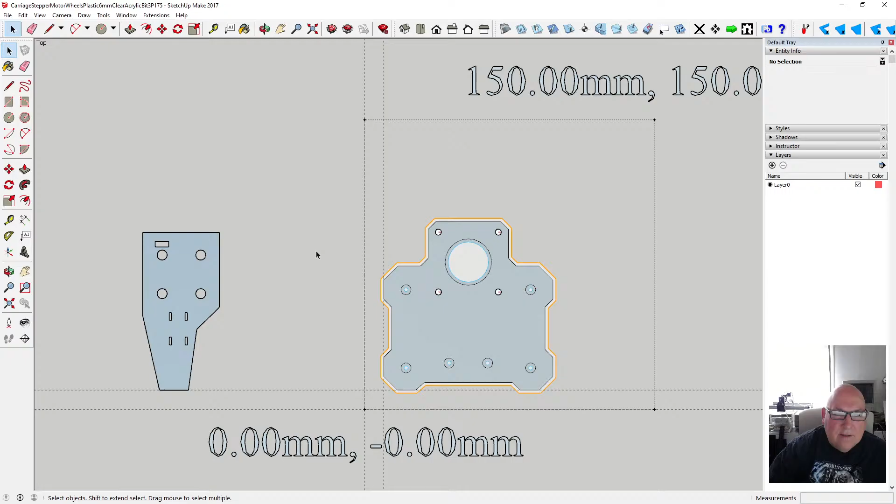So what I want to do is load up one I've already done the design for. Right, so we'll load up this one. Reason being, it's got all the right settings in it as well. So I've already gone ahead and done that one.

So I'm going to save this as... stepper motor, right. So this is going to be called tube clamps adjustable.

Okay, so get rid of that, get rid of that. It's the plastics, it won't be 6mm clear, it'll be something else. Probably 15mm. 15mm, or I'll tell you what, let's make it out of 6mm. I've got an idea. Right, I've got an idea.

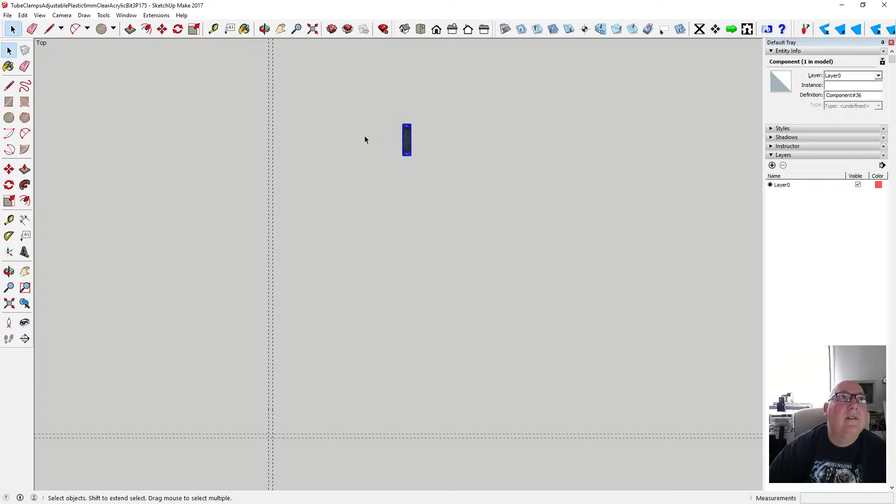So first thing we do is delete all this and paste in place. Shouldn't have pasted in place. So what we'll do, we'll grab this, bring it down here to work on it. Look at it straight on or ISO. I'll just bring that down here.

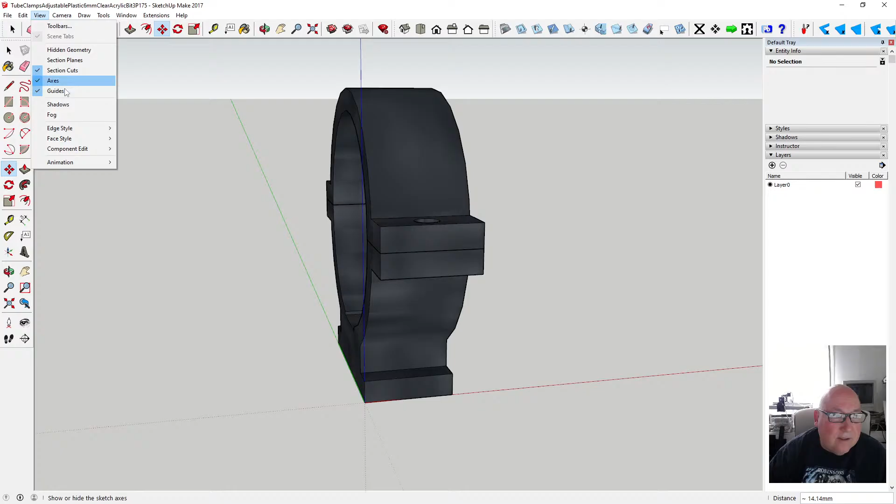So I'll just move that to the corner like that. Hide our axes. Okay, so we're going to start with this. We've already got, this is just the building blocks for our design. Now, I think I can either make it similar to the idea of sandwiching it.

Let's see what we can do with it. At the minute it's too wide. It's probably 20mm wide, I think. Yeah, I don't have any 20mm plastic, but I have some probably 10mm, not white nylon, which is not bad. It's nice and soft, it's not a hard plastic.

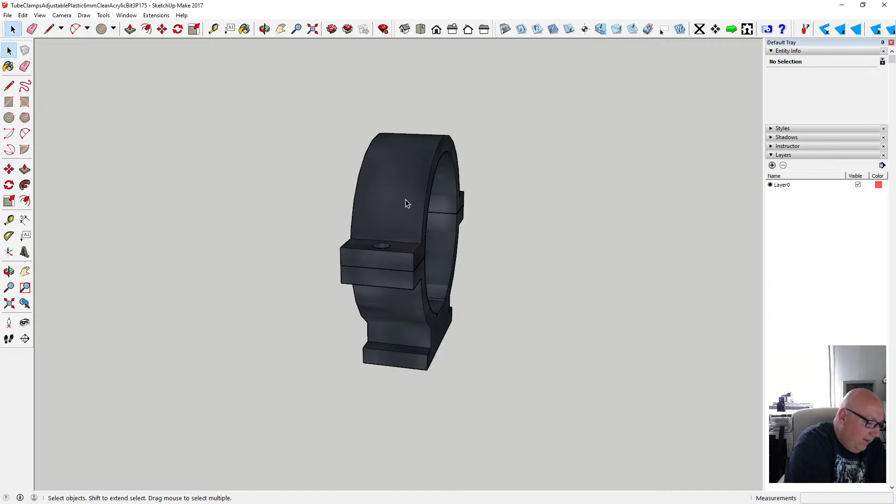So, anyway, I think we'll change it to white. Let's change it now to white. Let's change the design to a white, milky. We've got a synthetic surface. Light quartz grey, what's that like? Yeah.

Actually, I don't... oh yeah, that's okay to do that. Yeah. Actually, how did I get that? How did I suddenly? Right, don't know. I seem to have it all selected at first, so we'll have it white nylon. Hopefully we can see it like that.

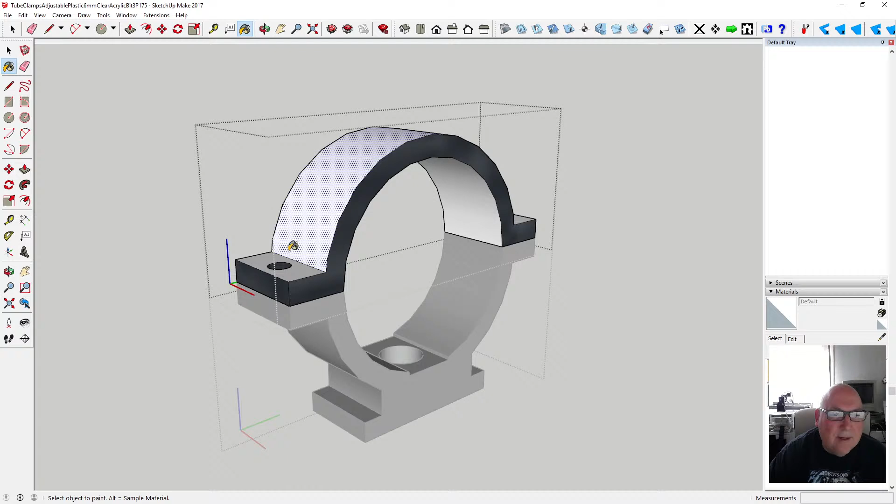Let's have a look. Yeah, that looks better. I can maybe, unless it disappears into the background once I've finished painting it. Let's paint the bottoms. Is it going to disappear into oblivion when I click out? No. Right, okay, that's alright, I like that.

So, yeah. Right, let's do the bottom one. So yeah, oh that's it. Selects everything, all the edges as well. Don't want that, I'll end up having no outline on it.

So I've got a nylon, something like milky nylon. I'm pretty sure I've got a bit of that material left.

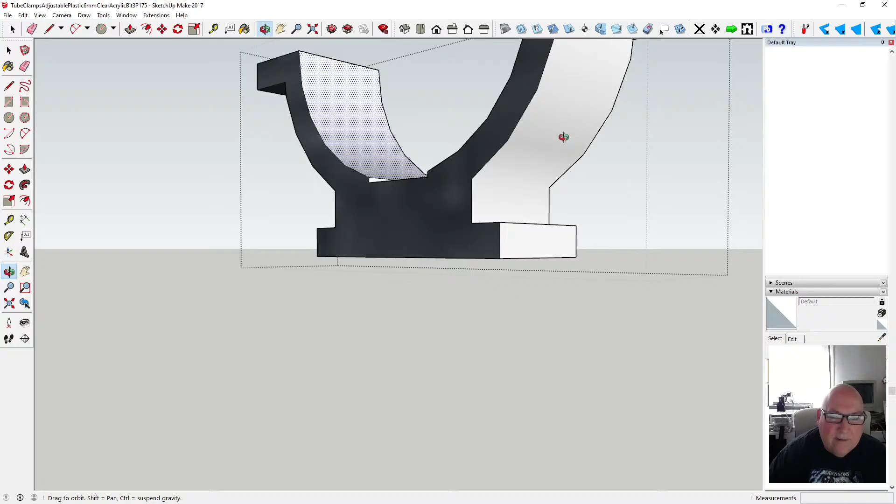Anyway, Friday night we had a bit of a stream last night. Bit of celebration on it. Celebrating, don't want to make too big a deal of it. It's nothing big a deal. But I think it's tradition to mark certain milestones with YouTube channels. They mark the milestones and maybe look back on it in better times or future times.

Okay, so we seem to have everything covered there now. Okay, so this is our building block. So it looks like we've got two separate things, so we need to continue to model this. This is our constraint, so we're constrained by the size of the tube, we're constrained by the height, which we can't change. Now we can alter the position of these clips and adjusters.

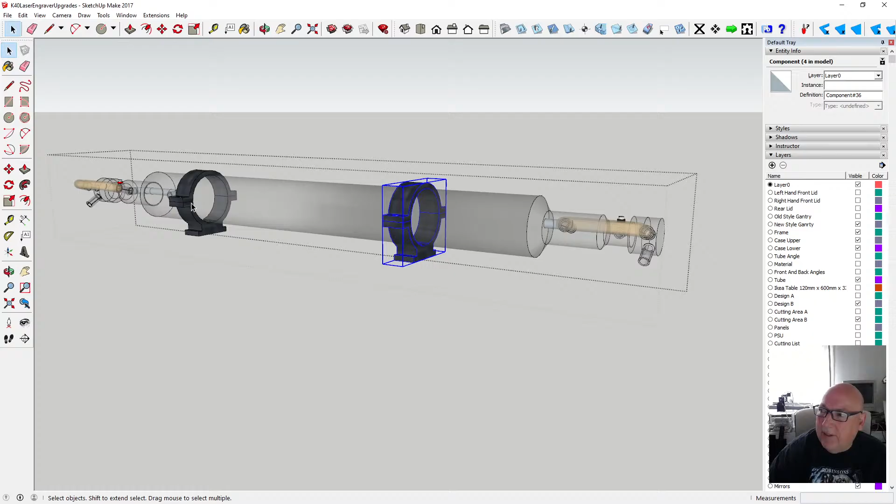So we might have to have two different ways of adjusting this, because there will be two clamps ultimately. One, as you can see, over on the model. We've got one there on the tube and one over there, just like that. I didn't really like the idea of them sticking out the sides. If they could stick up, I don't mind one sticking at the top. And obviously you need to join it up, whether they latch in together.

Actually, that sounds like a good idea. When I mill them out, because I'm not gonna - I was gonna 3D print them, but I haven't set the 3D printer up. I know I've got a known work path with the CNC and milling out the plastic.

So wouldn't it be nice if we could hook that through, if this one could be milled to hook through this one. So you bolt it, yeah, because we need to bolt it. There's a hole there, it needs to be bolted down. You can't see it from this one. Hang on a minute, so it bolts down to the...

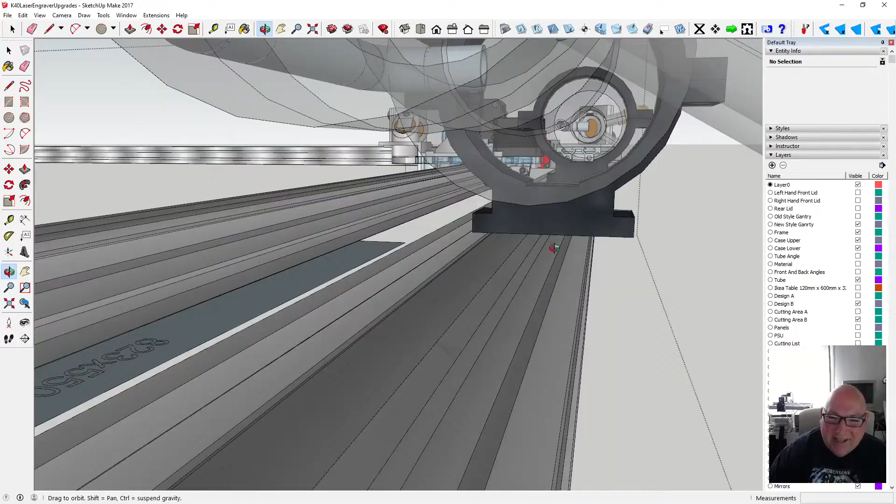Oh, some good news as well. Bolts down to there with a T-nut. Yeah, simple as that. So some good news as well.

I don't know if they've cancelled the metal from eBay yet, I don't care about that really. But I ordered some off Amazon, Rainforest. Anyway, it said it was going to come Sunday, it's now saying it's going to come today. So that is good news, I think it says today. Yeah, so hopefully we'll have it tomorrow. So by Sunday it'll have all the bits to be able to get on with it, basically.

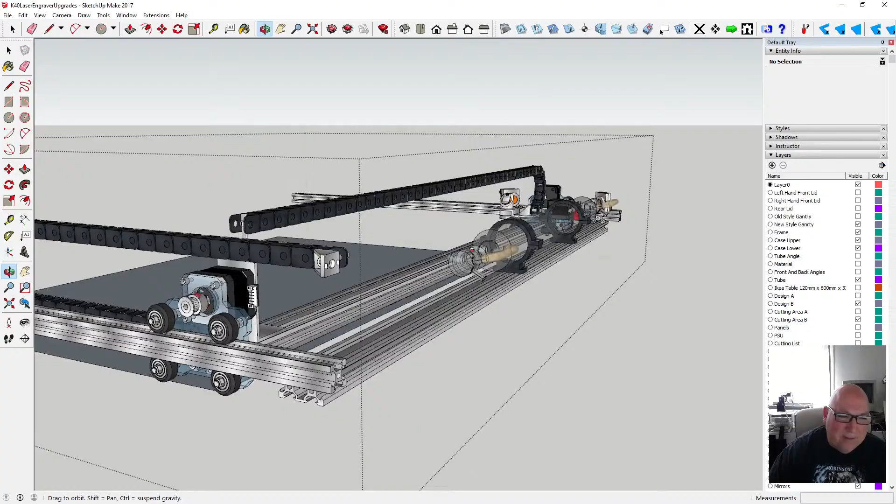So I'm going to take today's opportunity to create the plastics and the tube clamps and the end. These plastics here, we've already got those ready to be milled out, all G-code up and everything.

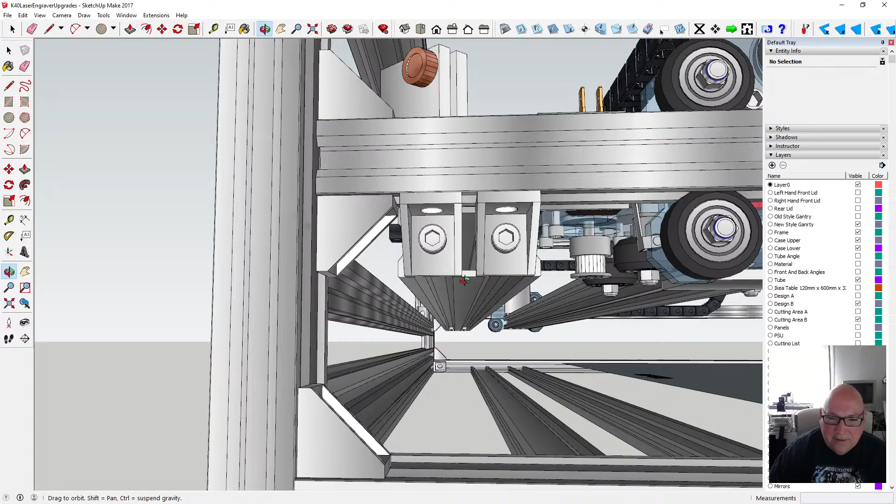So initially I thought we don't need adjustable clamps because once it's set, it's set. I mean really you could adjust - you can adjust, I don't suppose you can adjust it now. Actually no, no you can't really adjust. The way I've done it now, there is no real adjustment apart from any wiggle room that's in there. The only adjustment you've got is lateral, so you keep one end fixed and move the other end up and down like that, but I'd rather keep everything parallel as best I can.

So anyway, we're going to introduce some kind of adjustment, I don't know what, I ain't got a clue what. So it might consist of some kind of elongated hole here, you put your fixing through, then a screw adjustment that you tighten that moves this that way. So you need one-way motion on one and some kind of up-down motion on another.

Now up-down motion, not as easy as it sounds. Anyway, any clamp will be better than no clamp at the minute. So any clamp at all gets us started. I won't be putting that tube on anytime soon.

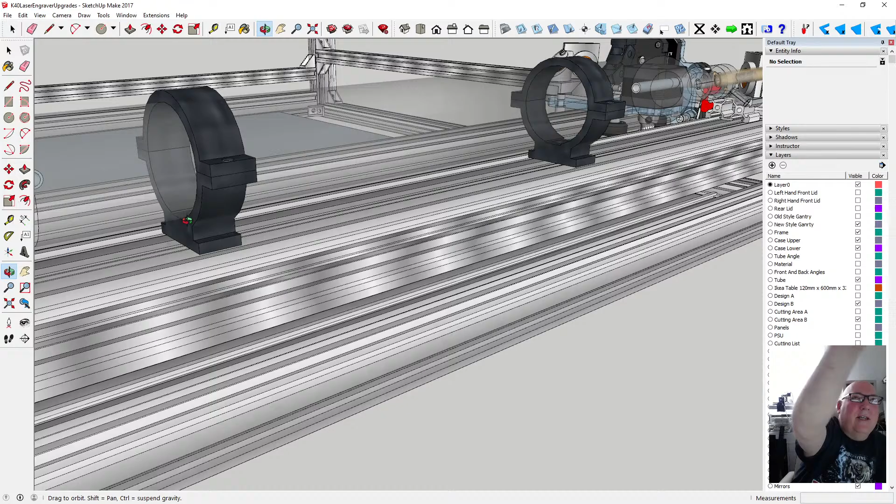As in, I'll be taking my time to line everything up properly, and to that end, I do need a set square. I don't actually have a set square, so I'm gonna have to go and get a set square. Yeah, so somehow grab a nice quality set square from one of the shops. I've got clamps, I don't have a set square. But to be fair, once you clamp the stuff together, hopefully if it's cut right, it'll clamp itself square. That's the idea, but it does need to be checked.

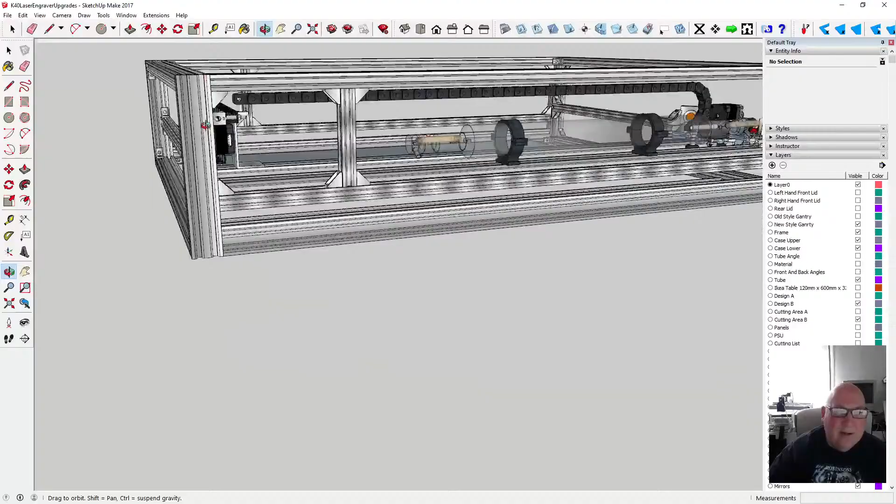Anyway, let's get on with this clamp thing. Design, right, so we've got it here. What I'll do is when I've finished modelling this, I'll put it back into the model. So, okay, so we don't like the idea of this anymore, reduce fixing. So how can we design this?

So it needs to hook into this, so that end will have to come out and under and hook. So let's just do that. So this will be fixed, you bolt this down first.

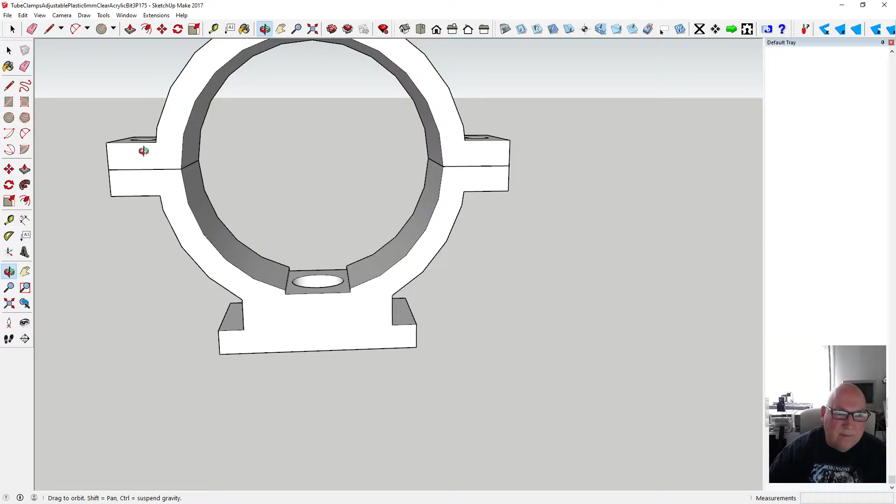So you bolt this down to the runner first, then you take this piece and hook that in, and then fold it over the tube and tighten it there with a nut and bolt. That's it, and that'll also have the added bonus of getting this out of the way.

It'll stop this thing from sticking out a bit here, getting close to this, when the carriage moves over the stepper motor gets close.

I'm thinking if I was to get that flush over this way, in line with that, I might be able to increase the bed size a little bit, maybe get another 10 or 15 mil out of the cutting area. Worth an idea. Anyway, let's just get on with that then.

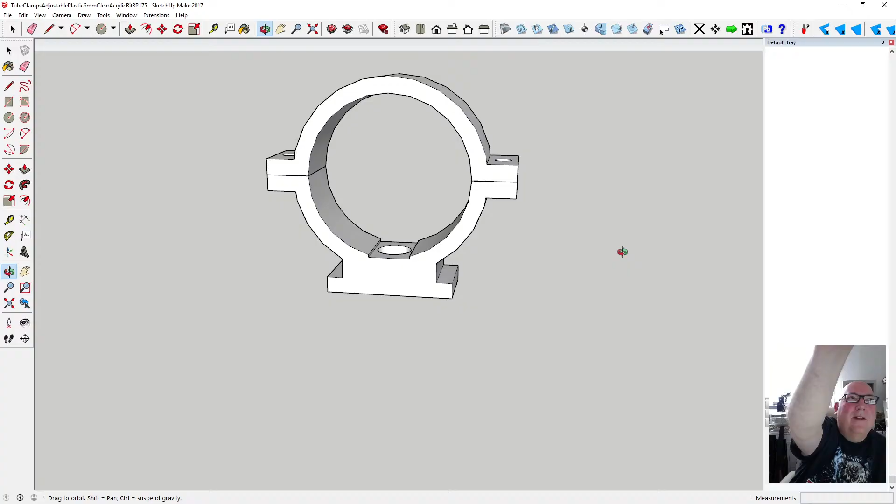Six miles south of Helston - I went there on holiday in Cornwall, south coast of Cornwall. It's coming out, went pretty well.

Right, so let's redesign this then. I think we'll do the bottom one first. Now it's 20 mil wide. Okay, so if we do it out of 6 mil, 3 lots of 6 mil, it needs to be 18 mil. So can we do that?

Let me just think. Well, I'll probably glue it, acrylic cement it, and we'll have grooves, I think. Yes, so we split it into two basically, so it'll probably occupy only...

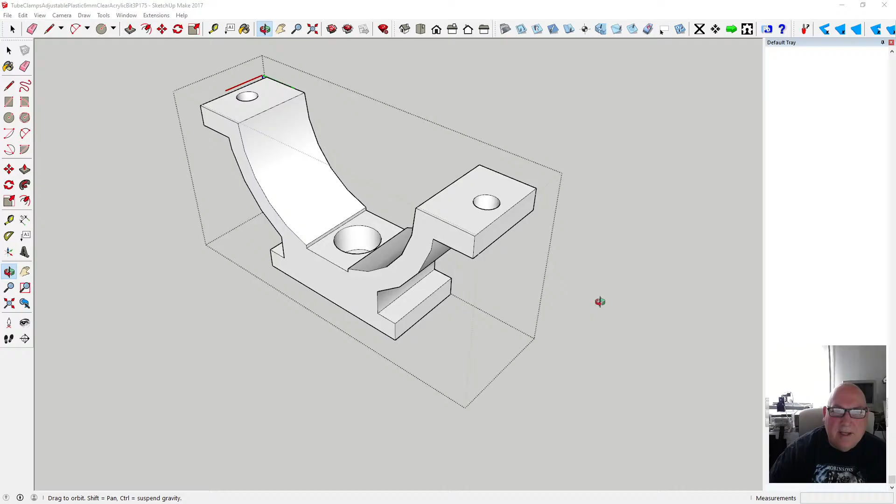I've done a similar thing with the case. If I create another instance of this, I could have a look at the way that it worked on the case. Okay, Amiga, there it is - just got 3 instances of this running now. It's crazy, isn't it?

Anyway, so it worked on the case, so let's have a look at this case. Basically what I did was this: milled out one half of it and the other half, and made a pocket that the bolt, the screw and the nut could go in, and it holds the two together. Now that was before I glued it, and it worked out okay.

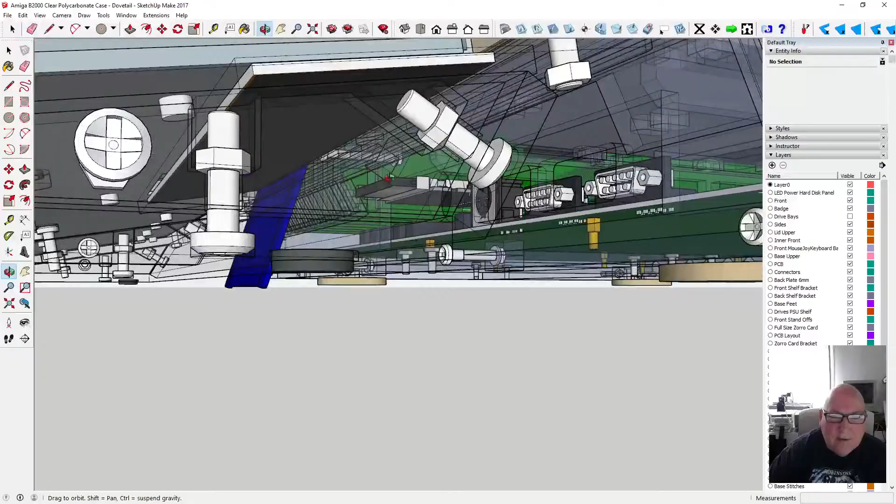So the next thing, I glued the keyboard. The keyboard here I made out of 2 sections, 2 bits of wedges - you can't see it here. And so you can put a nut through without having to manually drill a hole. That's what I'm saying. So it turns out something like this - you can brace 2 bits together and create a panel.

Anyway, let's close that down. We'll leave that running for a bit. So if I make it 2 lots of 6 mil the same, then we'll reduce the size. I think it'll work - they're M4 pins, so we'd have to make it for M5 pins.

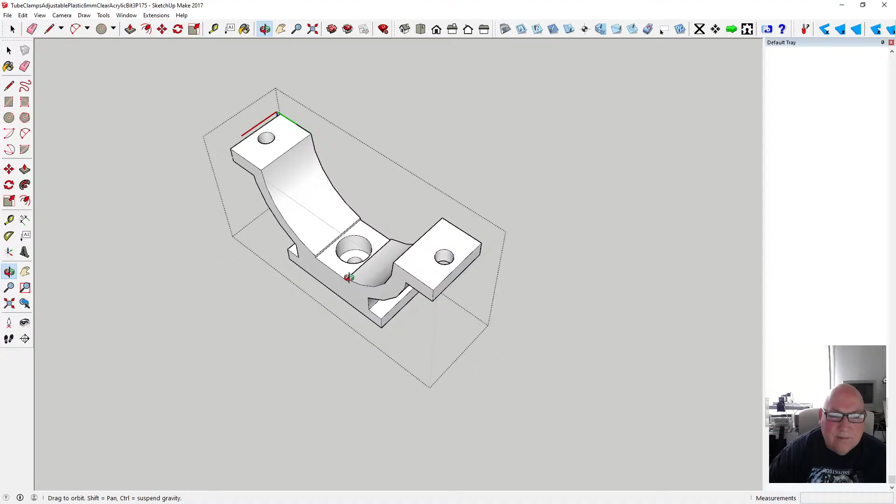So what we're going to do then is somehow split this into two. Alright, so we can do that now by basically putting a parallel projection on it, looking at it from above. Just make sure I'm the right way up. Yes, I am. So look at it from above, and if I select...

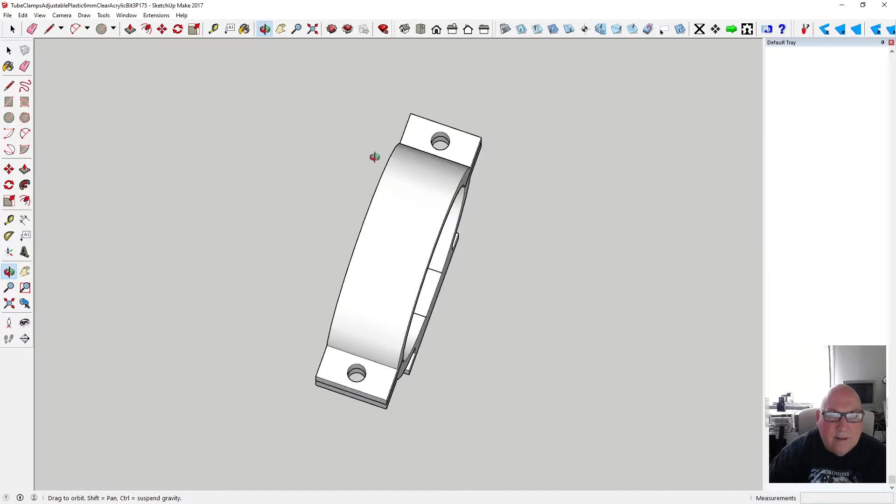Don't know if I can do this now. Oh, what happened? Oh, I've come out of it, haven't I? Hang on, I'm looking at the top piece. Do the bottom bit first.

So let's have a think. I've got to turn this into a square because I can't mill round. Well, I could, but I don't want to mill round. So let's square this off. I can probably square it off in 3D - let's do it in 3D.

Right, so we've got a flat square there already - well, that's good, already good. So what width have we got on this? Let's have a look - 11 mil, that's plenty.

So if I just draw around this, just convert it into that, then what we're going to do now is make that - still need to lose the nut, so we'll push that down to there.

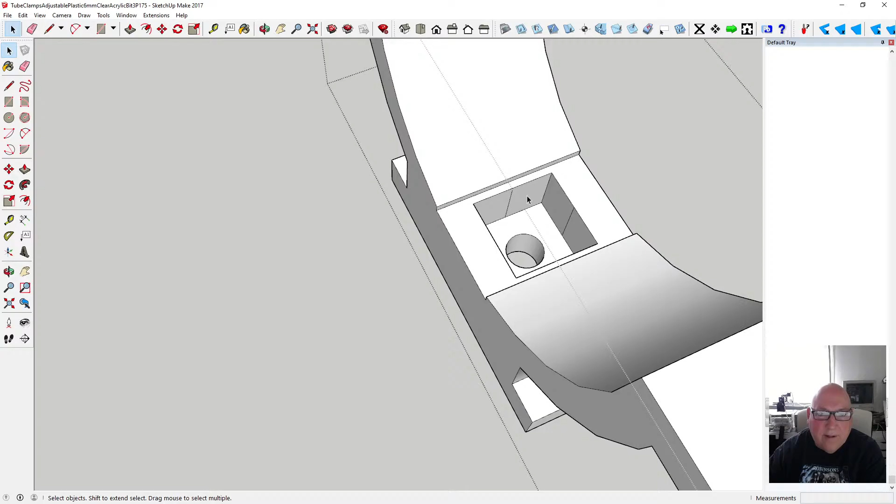Okay, so we've got it down to there. We need to lose this circle, and we can lose these bits of geometry now out of the way. We will split this up in a minute actually as well into two. It makes it easier when it's not a round circle - it makes it easy to split it into two.

So we also need to do the same here. What size is this? 5 mil - that's fine. Let's put a square around it.

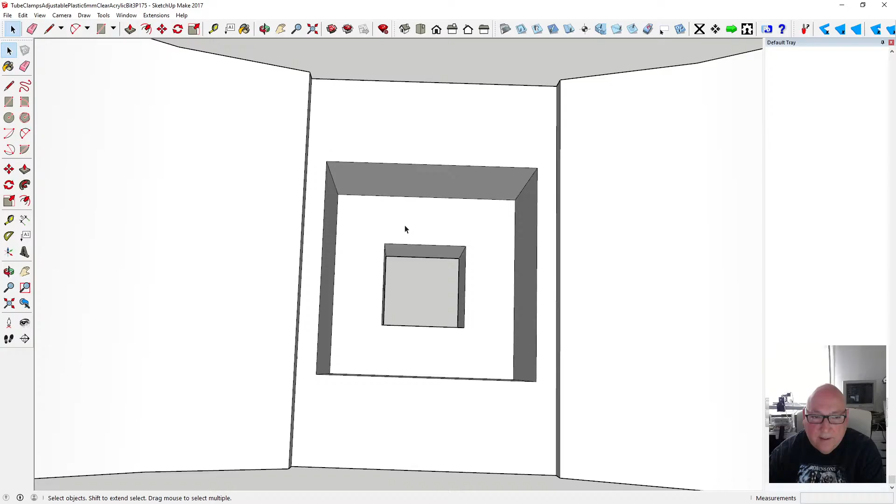Do the same again, make it into a square. Then we can get rid of this stuff as well. We're going to make it out of 2 bits of plastic.

The only thing is we want it flat, and once it's flat we can carve the channels in it that we want. So that's still got the same capability.

Let me just measure what that is there. 5 mil, and we've got 7 mil. So I think we need that much for the cap head bolt to disappear in. So I'll keep it like that.

And we've got, what's this one? Did I say 6 mil or 7 mil? 5 mil. I'll tell you what, we'll make that - it's going to be 2 halves anyway, so it doesn't matter.

We're not going to over tighten it, but I think we'll go a bit further, a bit higher. Yeah. So,

What's the size? Let's try and go halfway. 12.9. I'll tell you what, at least make it 6 mil. So we've got 6 mil depth on it, so that gives us 6 point something, that'll do.

Right, so we've got that there, that's better. Now this bottom bit, the width was 20 mil, just to spread the load across the member.

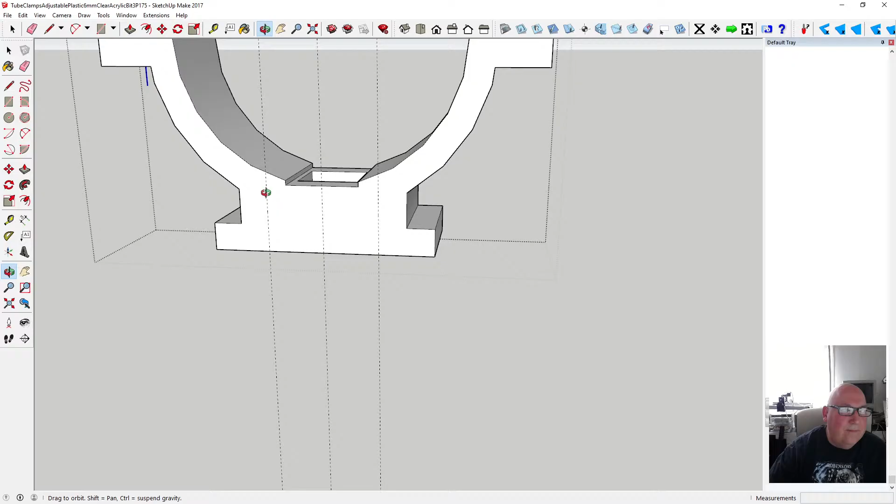Now what I'll need to do is extend the tube around a bit if I start doing that. So what I need is some kind of curve there. That doesn't look too bad, does it?

Right, and then we can basically draw - somehow need to, yeah - we draw a line here, up to there and up to there, and from there to there to there. Then we can push this out.

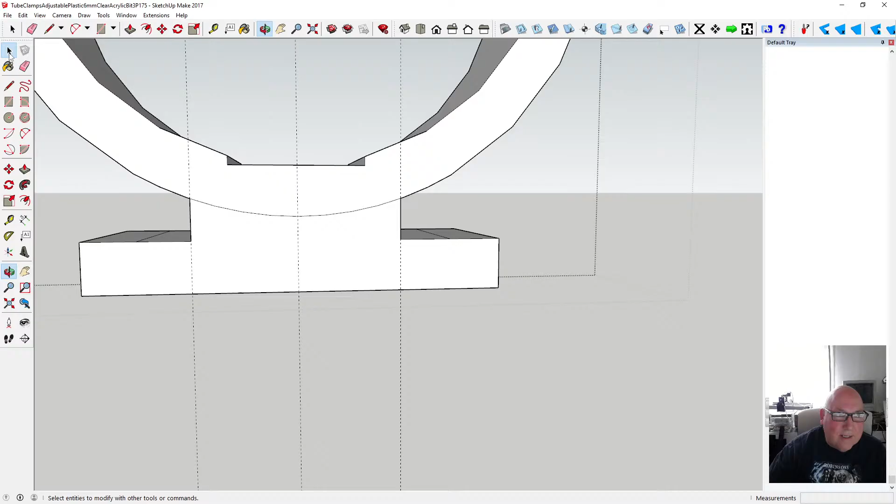Okay, and then that means we can get rid of this now, and these. So we've got 40 and then 20. We can get rid of these as well, and get rid of the centre line, of course.

Right, so we've changed it a little bit. We've kept our height though, and we've kept our tube inner OD, the inner size of this, the ID. Okay, so

That's good so far, but we need to reduce that down. So let's bring that down to there. That's it, makes it more space for our adjustable end. Now we can get rid of this as well.

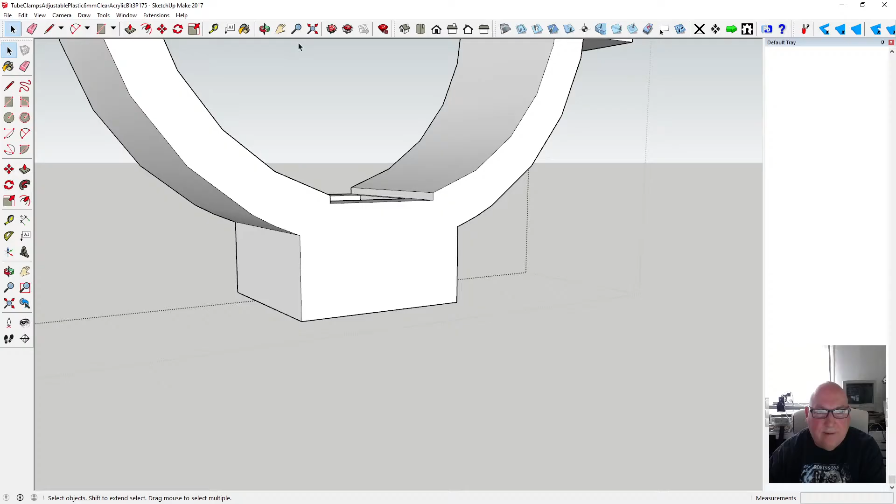So basically this is wide enough to sit on a single 2020 aluminium. Okay, now the other thing, it's too wide.

I need to make it out of 6mm, this acrylic or plastic. So we need to reduce the width now, so it's 20mm. Okay, so we need to come back down by

4mm a side. Come in by 4mm a side. And also need to - this area is too big now. Let's have a look, what area have we got here?

11mm. So we only want an M5 fixing. And the cap head bolts, we need to find out the proper width size of the cap head bolt. Let's just measure one of these existing ones.

So it's 7.6. So if we say 8mm, we allow 8mm. So what have we actually got? 11mm. So we can shrink that down a bit.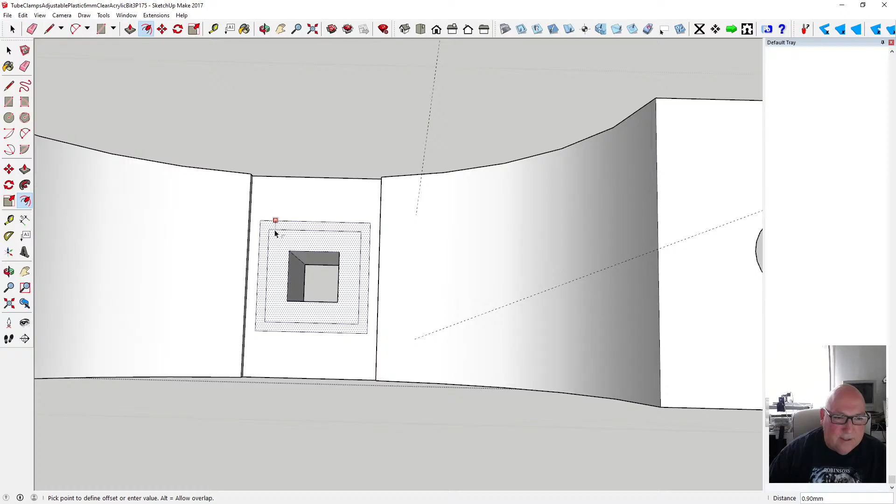So we can either step it like this. 11 minus - so we want it 8mm - so 3mm. Is it 3mm? Yeah, 3mm.

No, what happened there? 3mm - no, oh, it must be there. Must be bang on, so that's 3mm there. Oh yeah, that's the 3mm. So that only gives us 5mm, so that's not right.

So I need to take a bit off each side, so it needs to be 1.5mm, of course. 1.5mm, and then that should be our 8mm for the head, yeah. So now get rid of this one.

And we need to drop this down by - we said, what is the size of this? Let's have a look. 12.19. Tell you what, let's make it easier for ourselves, let's go 0.19.

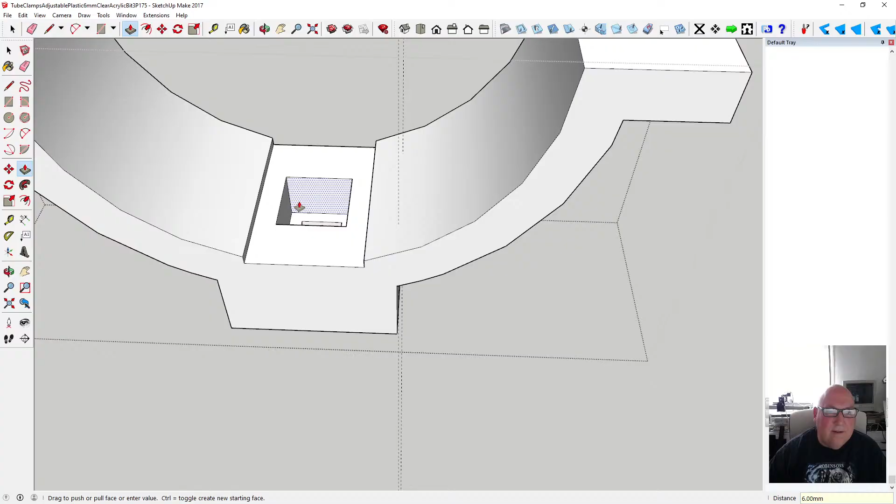0.19, and then we'll put that down by 6mm. So we've got 6mm, and we've got 6mm to lose the - we've got to lose the head. Right, head of the cap head screw.

And I don't think it's 6 mil, let's have a look. Pick up to measure. So it's 5.19, so yeah, it's 5.

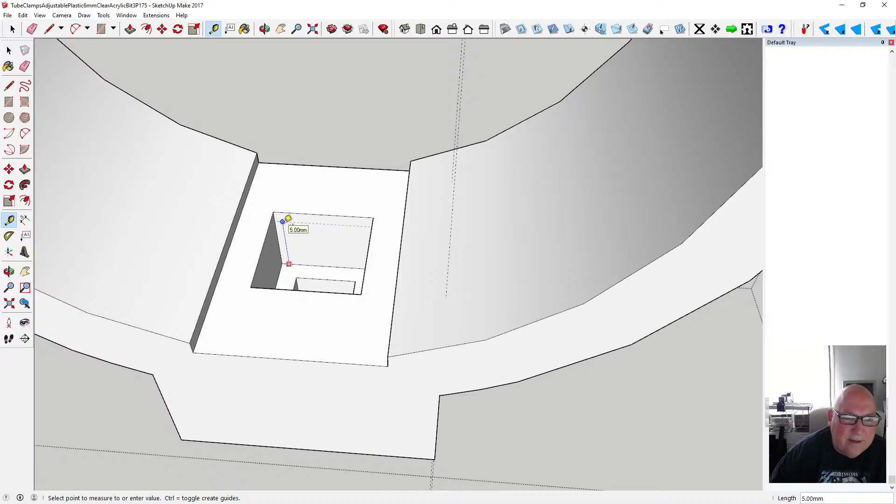So you should be able to lose the cap head bolt, plus it's already got another 1 mil there, so your cap head bolt will come to about there. So you've got 1 mil there, plus you've got 2 mil clearance. So that's fine, so we'll have that there. Right.

So now we need to split this into two, but we've still got to sort out these. So one of these will be, let me just find out where the front is. Okay, so this is the front - the side with the meters on it. Yeah, so right, let's just go back in.

So that is the front, that's the bit we'll have a screw on. So the back bit needs to be the bit that has got the slot. So let's first make the screw part.

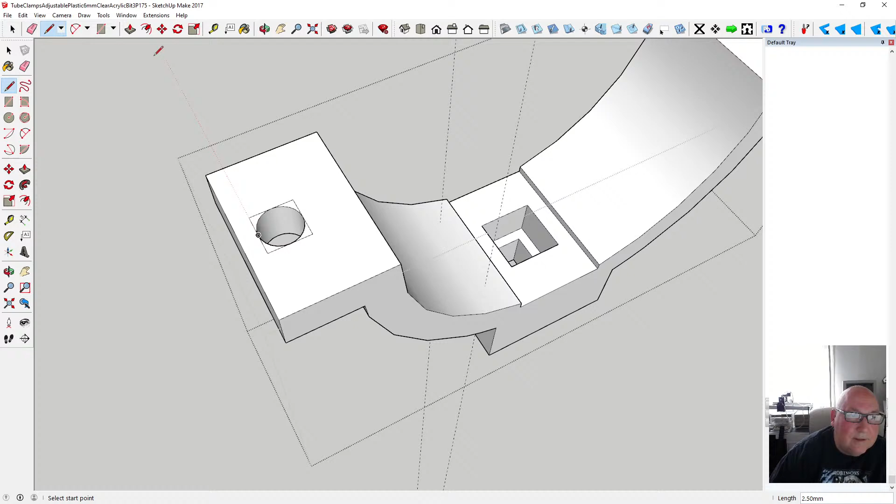Let's get rid of this screw part here. Let's turn that into a square - same idea, just makes it easier to mill. Just haven't got to bother trying to create it. Anyway, this idea works, I've tried it. You can glue it together, bind it together with glue, so it's really good.

So this hole now should just be 5 mil, yeah, 5 mil by 5 mil. Now it's a bit thin on the end, 2 mil, so we'll have to sort that out, but that's okay. I mean, yes, it could go over a bit.

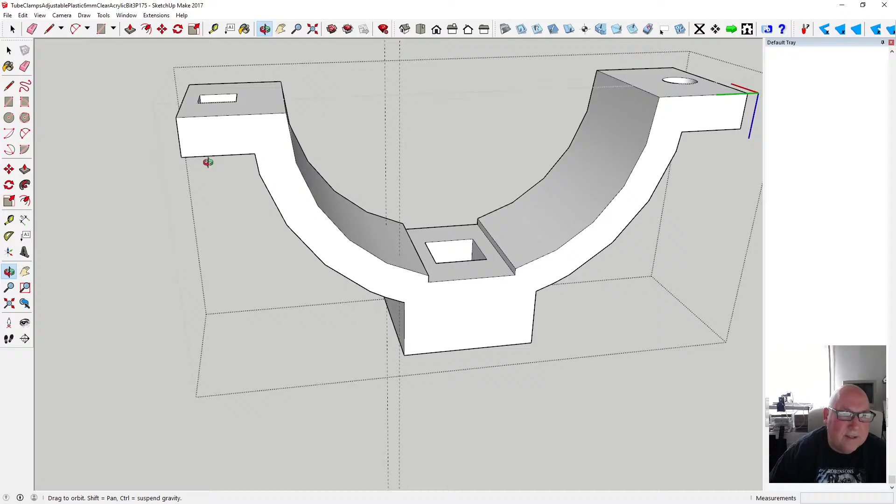Because yeah, we've got to have room for the nut though, so it's got to stay where it is at the minute, right? We need a bit more meat on that, so we might have to do something with that, but leave it like that for now.

Right, so now then there's the back bit that needs to have the other piece slide into it. So let's just get rid of this hole altogether. Make sure we haven't selected any of the bottom piece - no, we haven't, so just delete that hole out of there.

Let's put some measurements on it. So we've got, now we're too big still - that's the problem. We need to come down to 12 mil. So let's do that first to those lines there. We need to lose the sides down by 4 mil each.

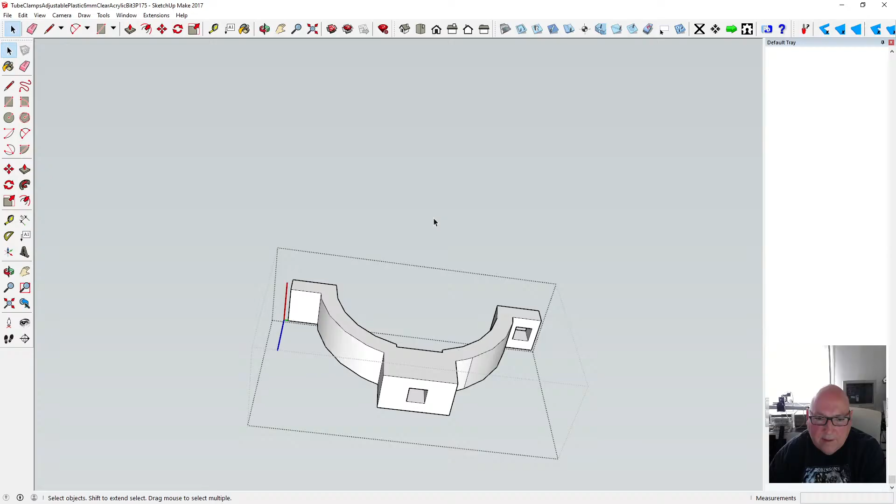Turn it round, 4 mil. Right, now we can lose the construction lines because we didn't really need them anyway. So we've got that, and it's still one piece - it's going to be 2 pieces glued together. So we've still got some meat there for our bolts, so that's fine. Yeah, so we're okay - that's the screw, nut, M5 cap head and lock nut for adjusting it.

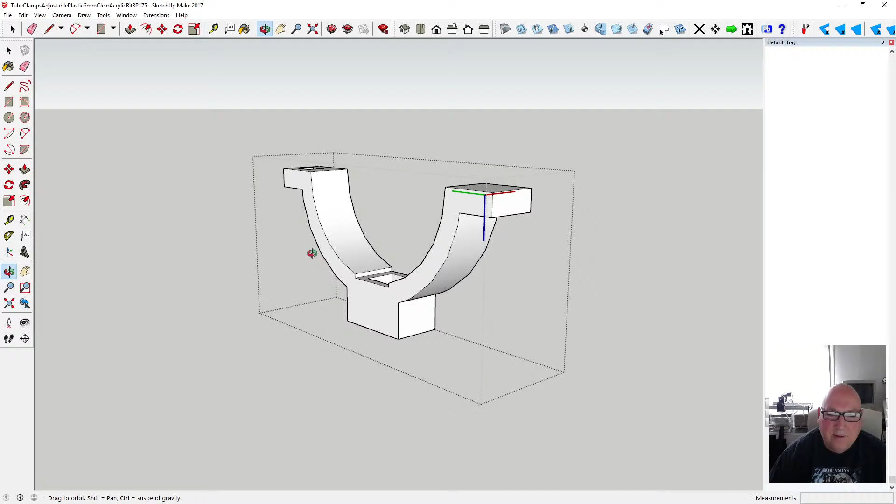Now this bit, this needs to have a hole in it for the other bit to glide in. Well, it's made - imagine we're going to cut it, mill it down from this side. This will be laid flat. So let's just create this other hole here. Now it needs to be whatever it can get out of it.

If you do the geometry right and you tighten it up, don't over tighten it, it'll be fine. So let's see what we've got here. There's no nut got to go on this bit, by the way. So 9mm by 12mm. So if I come in 9mm, what's that like? Yeah, that's it.

So we can do that, and if I draw a temporary line there, and step it in 2mm, 2mm - right, so we've got a 2mm thing all the way around it. Yeah, okay, now we can get rid of the line and the geometry. Right, so we'll push that through, all the way through there, that's it.

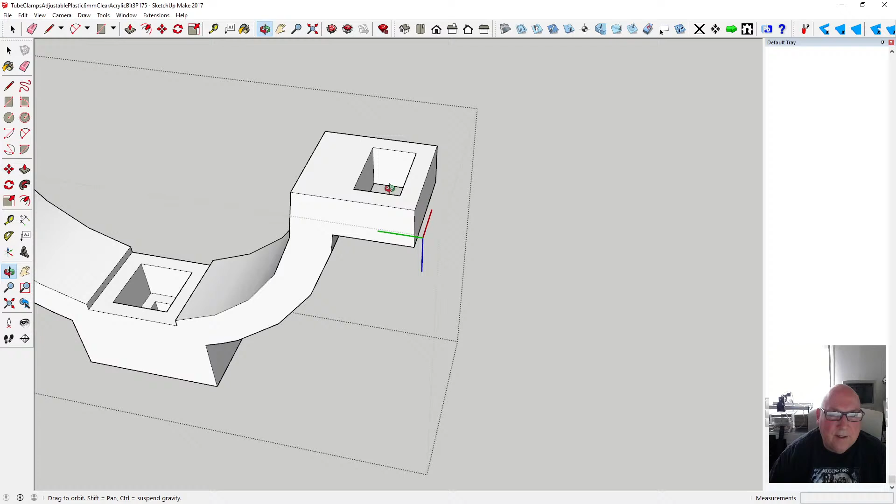So we've got this thing that we're going to push, and we can do it at an angle as well - we can bevel it a little bit so it's not a harsh thing. We'll leave it as it is for now though. Let's do a save on it.

Right, so now we need to split this into two. So how we split that into two is look at it from above, take the parallel, go into parallel projection. Now we need to select, need to draw a line down it really.

I'll tell you what we do - how do we do this? Yeah, this is awkward. So, is there a way of looking at it from the side? No. Above, or yeah, there's no real way of doing it.

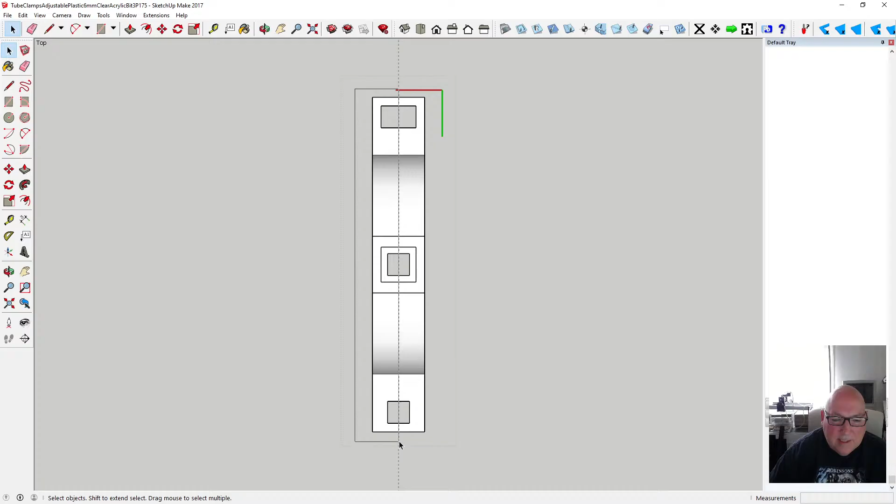So let's select it. Tell you what, let's put a line on it first, halfway. Then we'll try and - I don't know if we can select, you can't just select that. It's just going to select the one side, isn't it, with the geometry. So, that's an interesting one. Never had to do that before.

So, what can we do? I don't know, let's have a look. Don't know what we can do here. Unless we just design it from the offset.

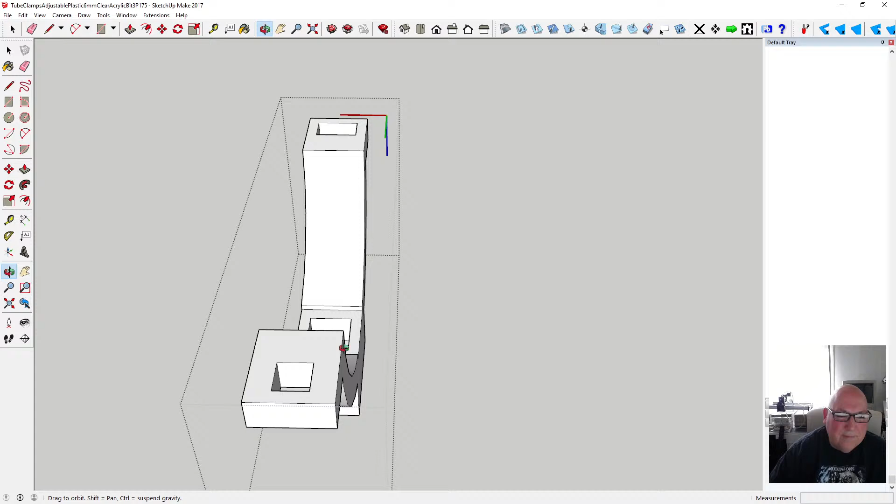Right, so we've got two - actually, we've got two 6mm, yeah. Let's just split it, so we know we can do that. No, that's the wrong thing. We know we can do stuff like this.

This is what we can do, partially - we can do partially split it. Oh, hang on, so we can actually split it, sort of. Yeah, we can start splitting it.

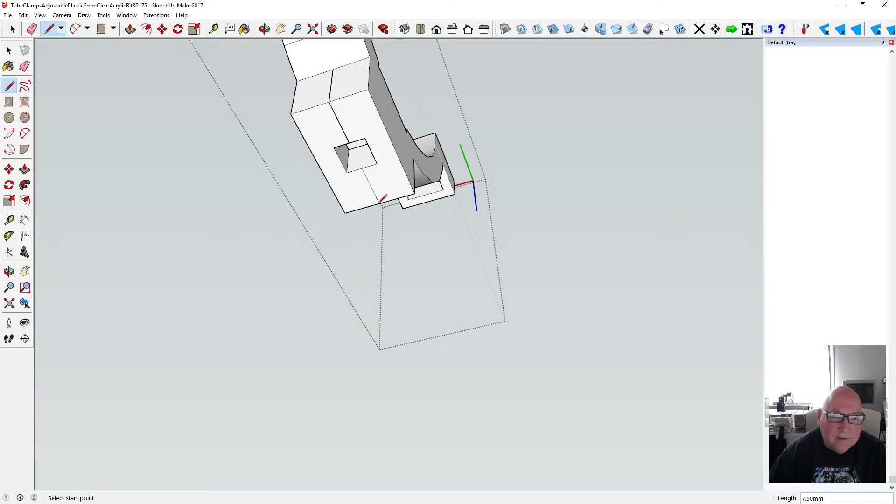It's sort of splitting it apart from the curve. Right, let's keep going. So we're trying to split it into two. We can get so far down it.

Right, so we've got it split into two, sort of. Oh, there's another bit we can do there. So this is the general idea. Have we finished? Not quite finished, look, there's some more in here.

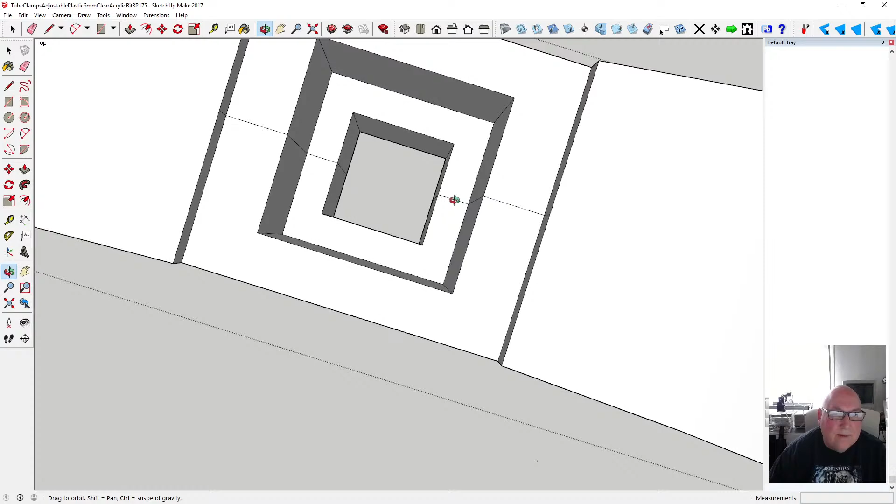Yeah, so we can keep going like this. This is one way of doing it. Right, so we've got them all covered. We've got our split there and there, and across there. Yeah, and we're all split.

I'm running out of real estate here. Yeah, that's okay. Right, okay, let me have a sip of this.

No, it's not an episode of the Time Tunnel. It's... yeah, the Time Tunnel. Here we go. Yeah, crazy, isn't it? Anyway, yeah.

So trying to split it into two. You'll see why in a bit. There's some more to do here. My God, my throat is a bit groggy this morning.

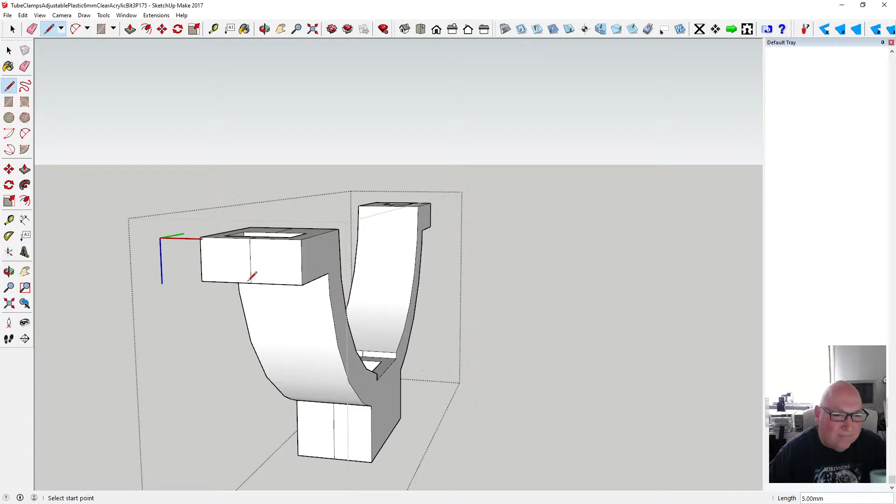Right, keep on splitting it. Got to make it into 2 bits and glue it. Whether I use super glue or acrylic cement - super glue is cheaper, acrylic cement is better. So what do we do? Probably get some acrylic cement.

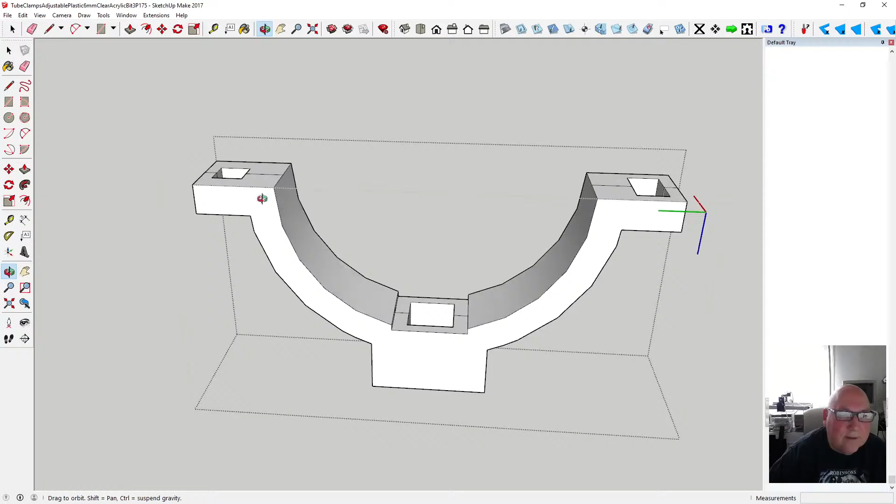So nearly finished cutting this up into 2 parts. Nearly. Okay, so let's have a look underneath. Oh, there's always a bit more, you think you've finished when you haven't.

Let's just have a look round it. Excuse me, yeah, that's done. So we've got one for a bolt and one for a plastic clip to go through. Right, that's good.

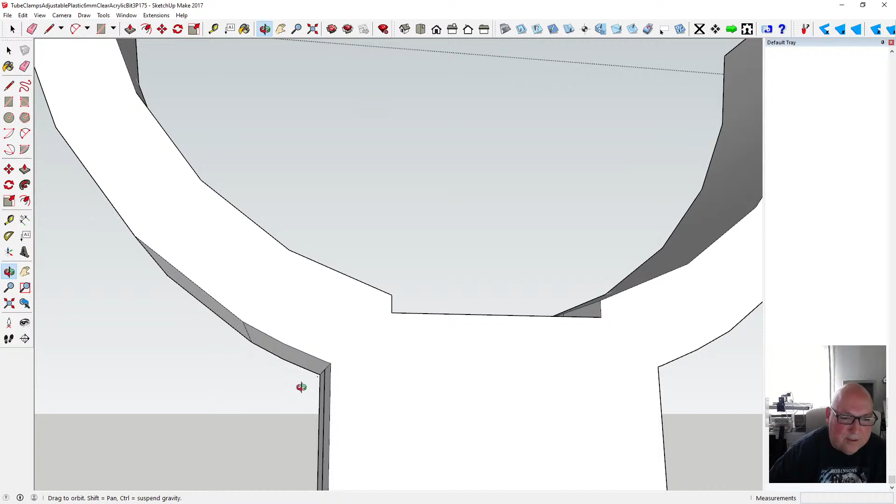So in reality, we don't get sharp things on a CNC like that. So what we'll do is sort that out next, and we don't want this sharp bit here really. So what we'll do is, well, we might want it. We'll leave it as it is. The milling bit will just do whatever it has to do. That's fine, as long as we can get some clearance and the head can drop in there.

Right, so we need to split. So we need to grab this now and copy it and move it over halfway. Well, that's automatically chosen the halfway point for us. That's pretty good.

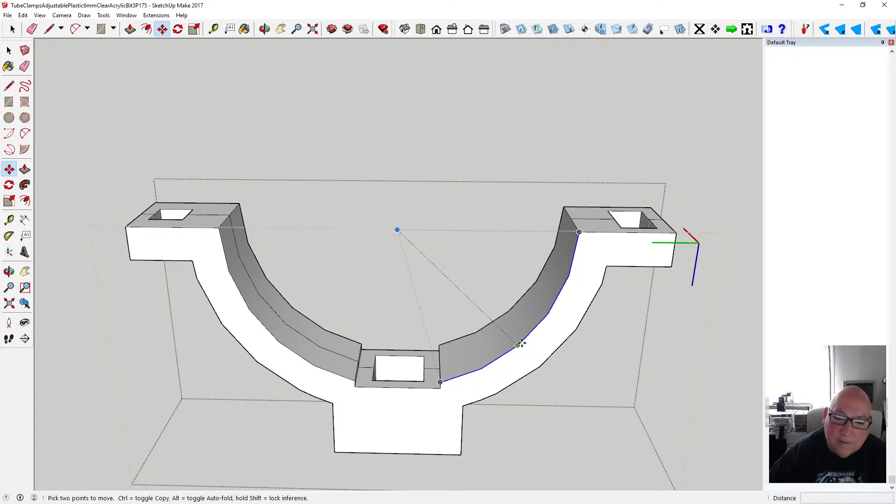And again, so we're almost split. Seem to have an extra line there that we didn't have before. Why is that? Don't know. What happens if we delete it? Not a good idea. I think you can clean the model up, but I'll leave it alone.

Right, so we want another one of these. Oh, it's split it up, hasn't it? Is there no way to get rid of that? Oh well. So that's it, put that there. Oh, I think now, can we get rid of it now? Or no, still a problem. So why is that out? Why is that there when they didn't have one there? It's crazy.

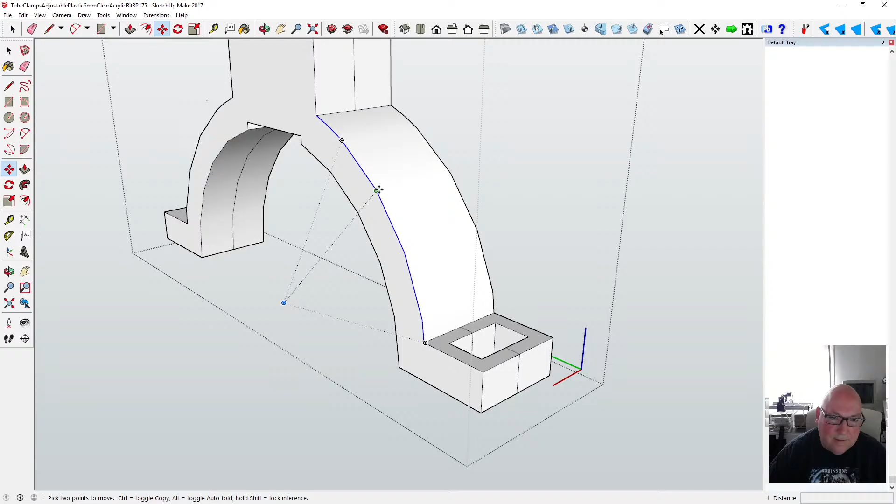Right, let's just do this. Oh, it is there, but it's just not visible. Let's do it from here. Right, so I think we've effectively split it up into 2 now. Effectively. So, excuse me, so if we look at it from above, go back into parallel projection, let's just save it.

We might be able to select half of it now. Yeah, and we'll copy it. We'll move it out 10 mil. Right. Actually, we only want - yeah, we need 2 separate halves.

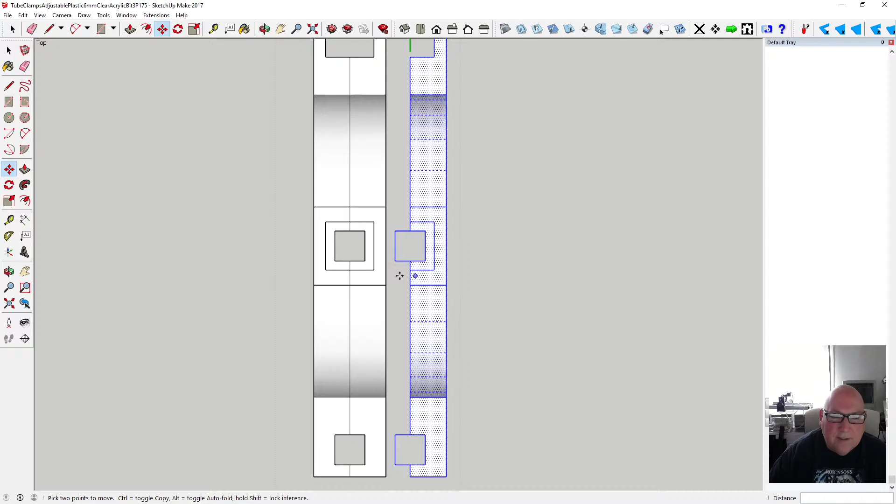So we don't need that, that, and that, and that, and that. We don't need that, and that, and that, and that, and that, that. Don't need that. And didn't get all of that, so that's fine. So we'll cut that out of there.

Come out and we'll paste it in place, and we'll make it a component or a group. We'll group it. Right, we'll move it over another 10mm to keep it clear. Right, so let's have a quick look at it and make sure we haven't inadvertently - yeah, we've lost some surface off it.

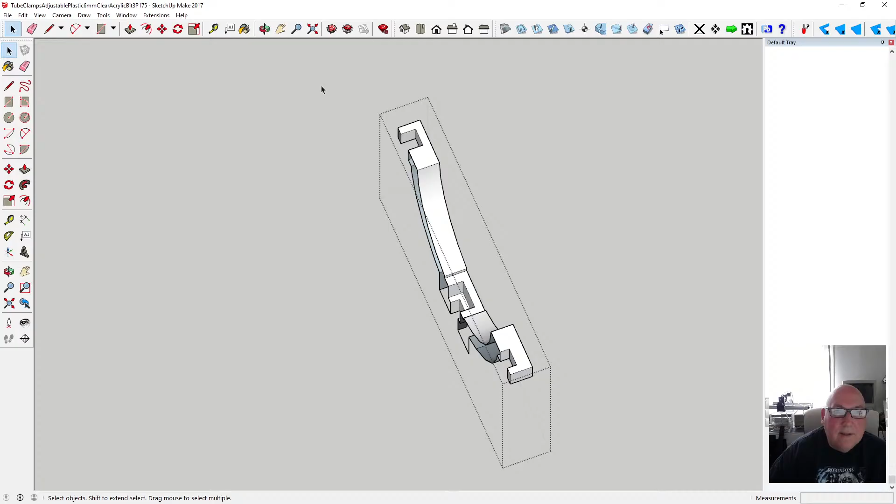So what we'll do, we'll have a look at that, get the surface back on it. Yeah, so all we've got to do is put some lines back, maybe. Let's try a straight line. Okay, that's got that one back. Do the same this side, maybe. Yeah, and possibly the bottom. Oh yeah, it's missing that corner, look.

So we've got that one back, but we need to get rid of one line, which will delete both, but then it should put it all back. No. No.

So take the side off there. Ah, so it's not having it, is it? Why not, you ask yourself? I don't know. Let's take a line off there. Still no good. Right, let's cheat.

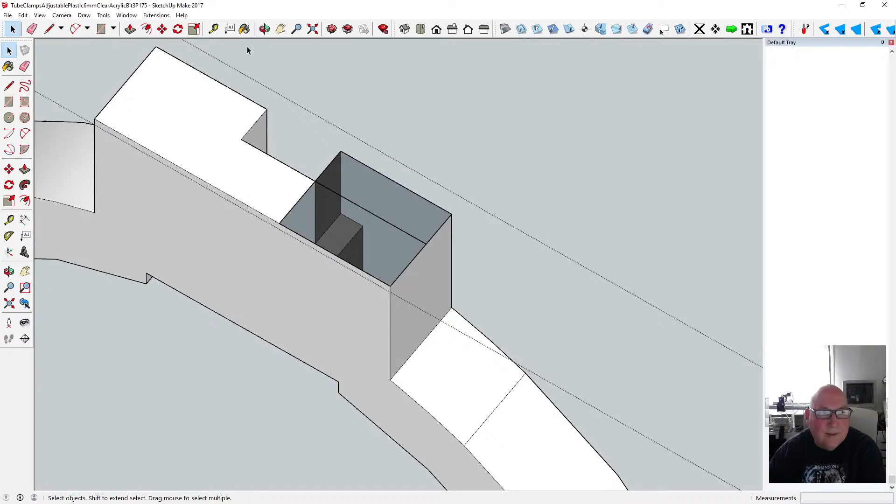Right, so strange goings on. Can we delete that one? No. So the old SketchUp's got weird stuff happening to it. The easiest way is just to draw in stuff.

There you go. And can we delete? Yeah. No. So something's not quite right. What is not quite right? Why won't it let me do? Oh, we seem to have a mistake here.

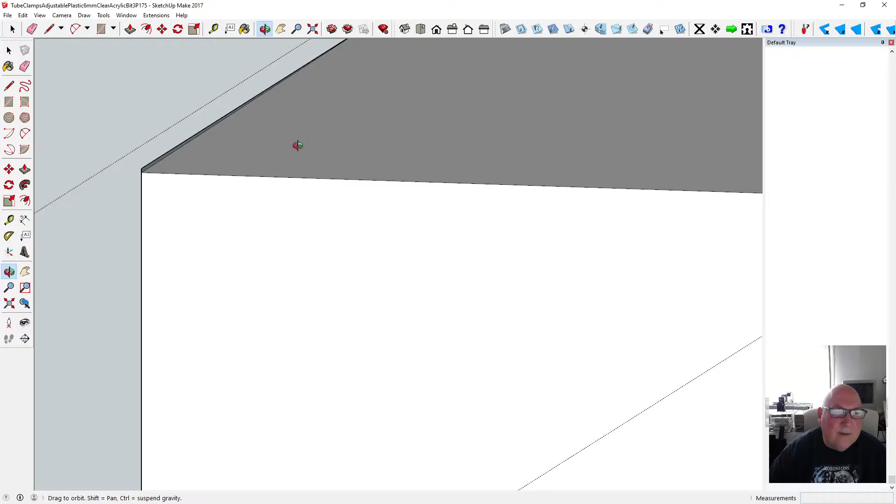Look at that. See that? We have a little mistake. One of these geometries is wrong. Let's find out which one is wrong. Let's have a look. Which one is it? The top one or the bottom? So the bottom one is wrong.

I'm going to have a cough.

Right, so let's sort this out. I'm not quite sure what's going on with this, but let's just do a bit of undoing. Let's put it in perspective. Can't work it out.

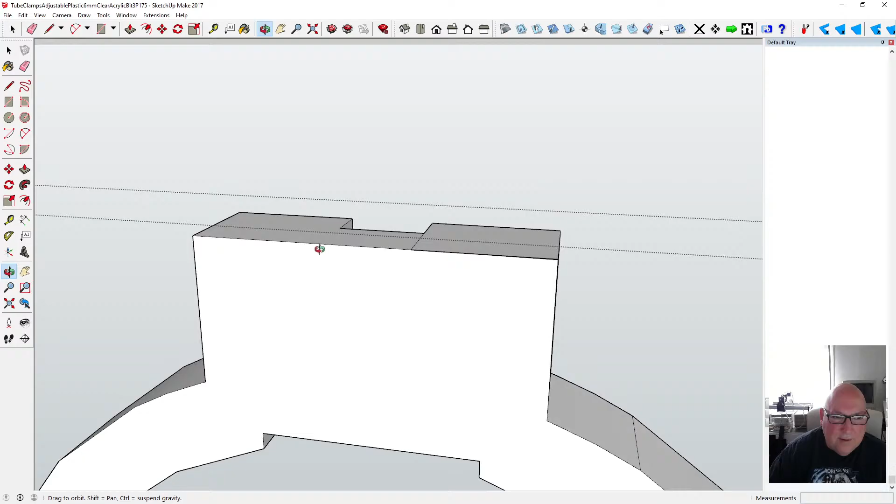Right, so if I do a rectangle, which one's it wanted to go to? The top one. Right, so that's why then. Let's get rid of that. Okay, we'll get rid of that one.

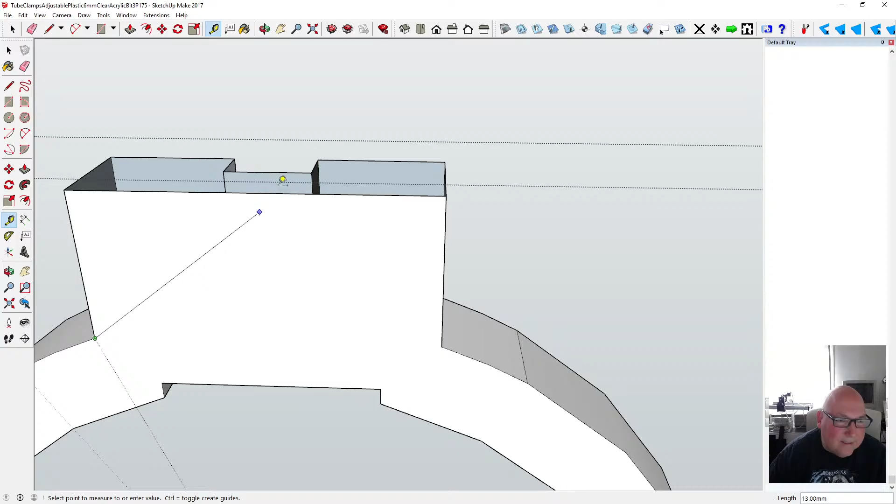Not quite sure what is going on. 9mm. 9.3. Shame. Something was wrong with the model.

Okay. That's a shame. Don't know what happened. Somewhere it went a bit of a drift. Where? How do we fix it? I have no idea. Let's just make sure it's not something we've done recently.

.3 that side. .3 that side. So we basically messed it up. Somehow we messed it up.

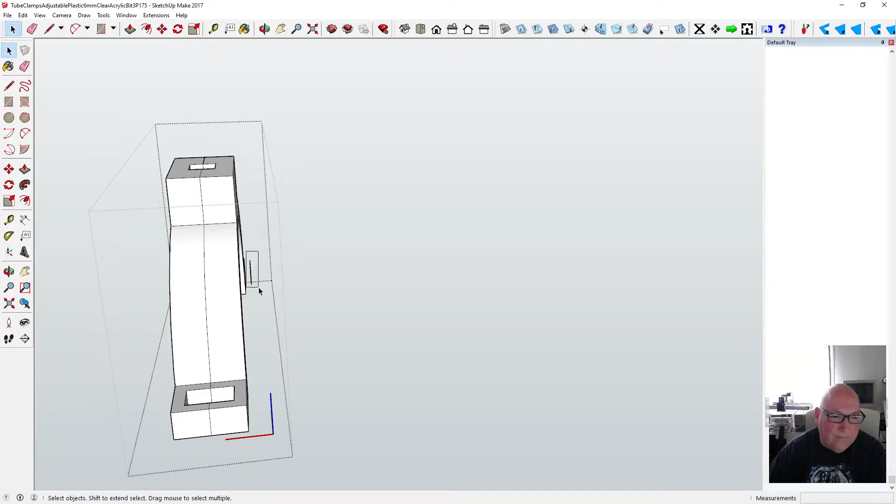So what we'll do, easiest thing to do, is just get rid of the mistake. Just get rid of that and go back into the model.

Right, look at it from above. Let's try again. Don't quite know what happened, but anyway, let's try it again. So we'll select all that. We'll copy it. We'll cut it. No, we'll copy it.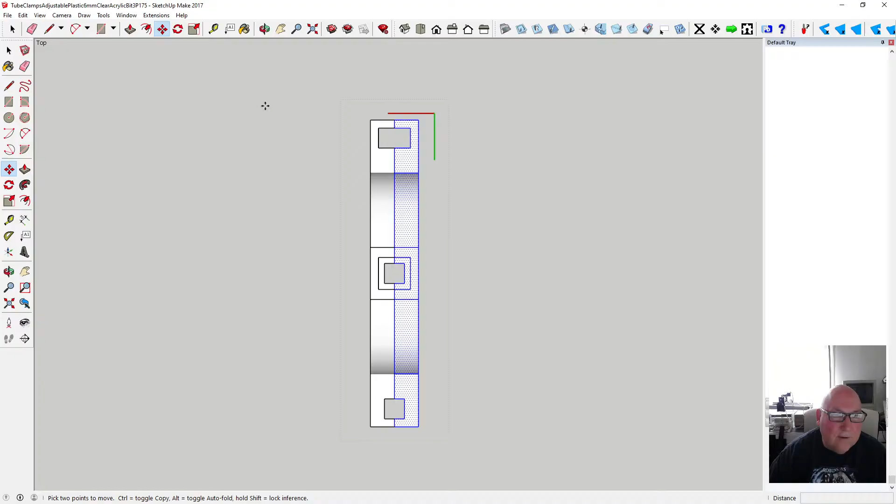Yeah, we'll come out of it. We'll paste it in place. Then we'll move it out. Move it out 20mm.

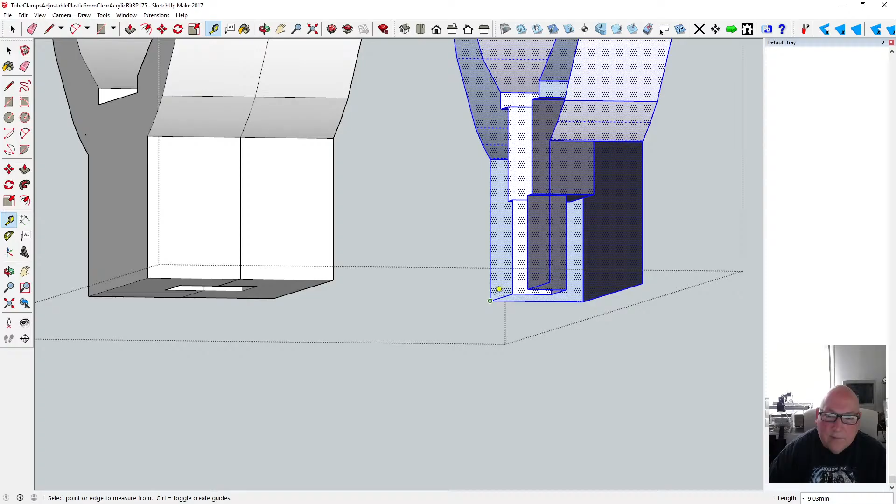And we'll do some measurements before we do anything else. .03. 9.03, so far so good. 9.03. 9mm.

I don't get it. Anyway, we know which bit's wrong. So we're going to cut that. Cut it. Paste it in place, make it a component, go in and repair it.

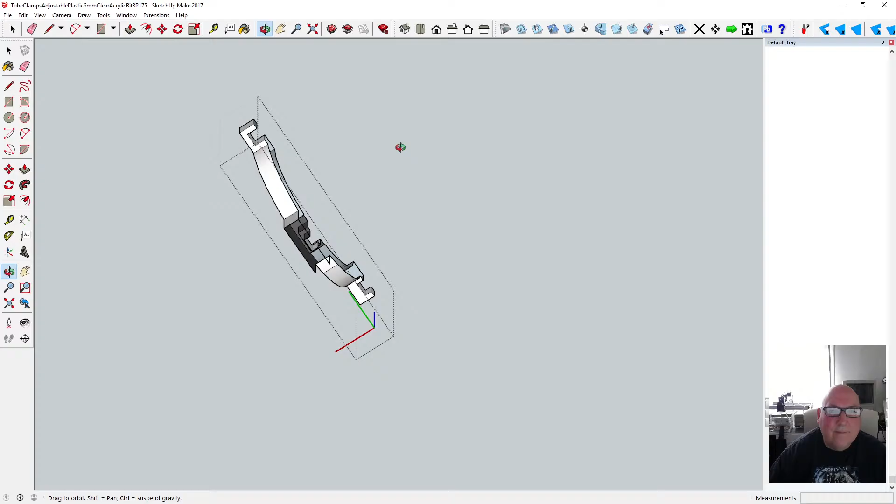Yeah, I've got to go in a minute, we're going shopping, so this is going to have to be, I was hoping to get this done, but it's not going to happen till later on, till I get back.

Alright, so, tell you what we'll do. Which end is the one that's not right side? It's that one. So we'll get rid of this corner and that. Let's put in.

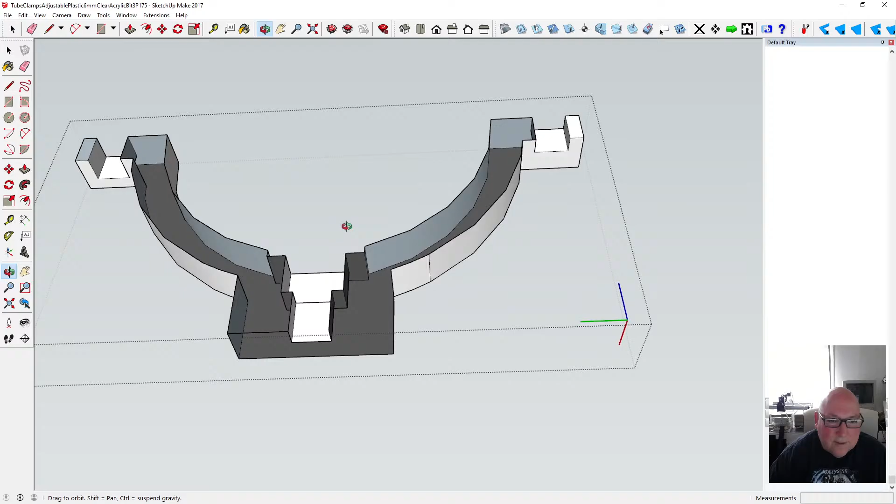It's hard to see like this, especially when I'm in this weird mode. Let's go in perspective, much better in perspective. So if I grab this corner and then pretend to come in at an angle, it's no good. I'm at the wrong angle to do things like that. So try again.

Let's measure it now. What have we got? 9.3, that's it. That's what we want. So that was a little problem. Don't ask me where the problem was.

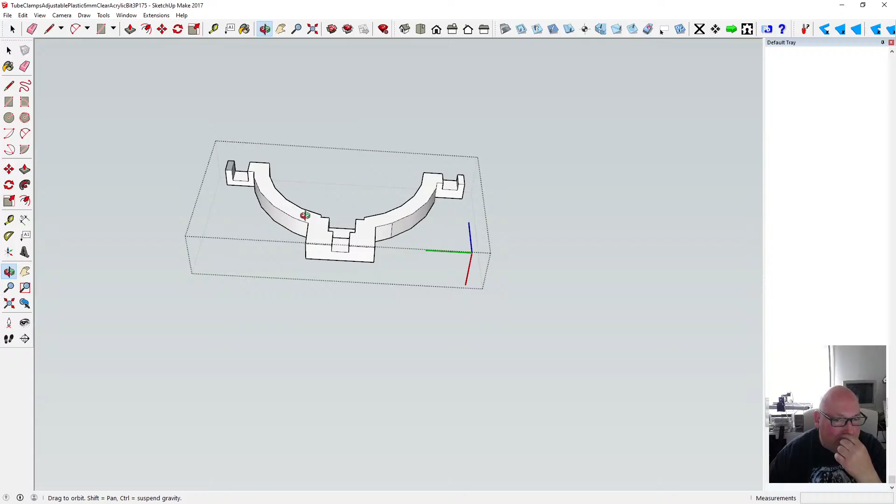So anyway, because we got half of it now, all we got to do is flip it to get the other half, and we can actually put our adjustment hole in as well. So that's our clip side of it. This is our screw side. Now we need to put an adjuster screw in here.

Now I don't know what the adjuster screw is going to do. Oh yeah, because we want an elongated hole, so we'll be able to adjust the lateral motion on it. So to that effect, we want to probably push that to there, so we've got quite a bit of movement on it. So let's push that over to there and this way.

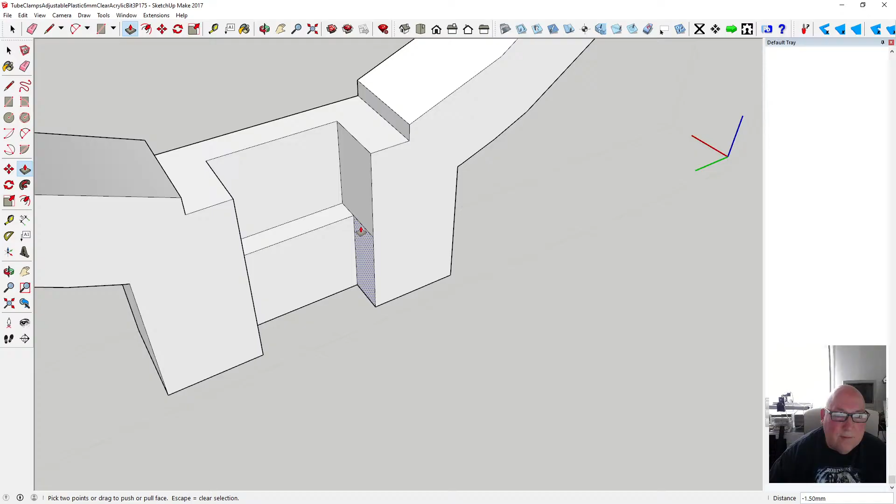This might prove to be silly what I've just done, but anyway. Right, so all we need to do now is work out the height of our slot.

So we've got 9mm. If I say 9mm, yeah, 9mm, so half a 9mm, 4.5, and we're going this way, 2.5, this way 2.5. So draw a line from there to there, from there to there, and there to there. Well, that didn't work out right.

Get rid of the lines. So get this done now. Got to go in a minute. Shopping time.

Right, so we've got that there. And we want 2.5mm drop on it, so we can get an M5 bolt in. That's just happened to be 2.5mm. That's good. So we drop that down to there. We can get rid of that and that line there.

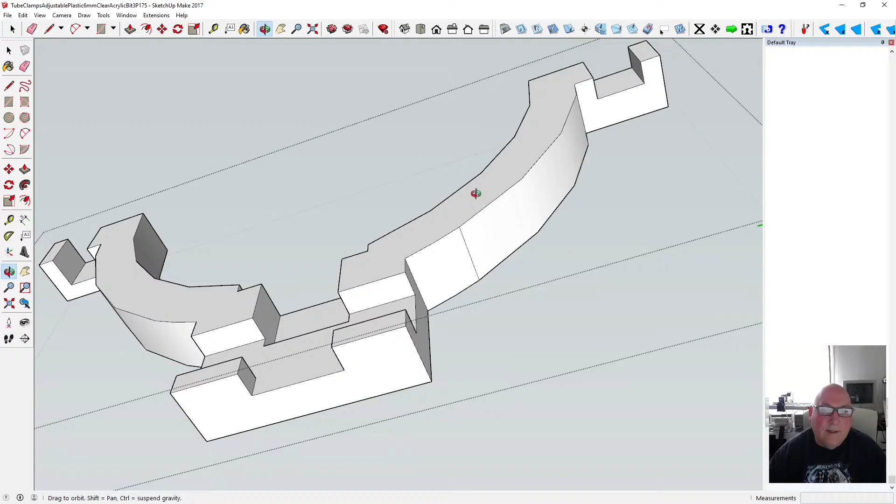Okay, so now what we don't want this done. We only wanted to screw this in and adjust this pin out, push against the pin, so it needs to be tapped. So that's what we've done is not quite right. Need a channel, but it needs to be tapped, or somehow be able to screw the cap head bolt against the pin that bolts it down to slide the mechanism back and forth. Or we could do that with an encapsulated nut here, but then we've got to miss the pin going down.

Anyway, that's going to have to be it for now. We'll carry on this afternoon, but you got the idea basically.

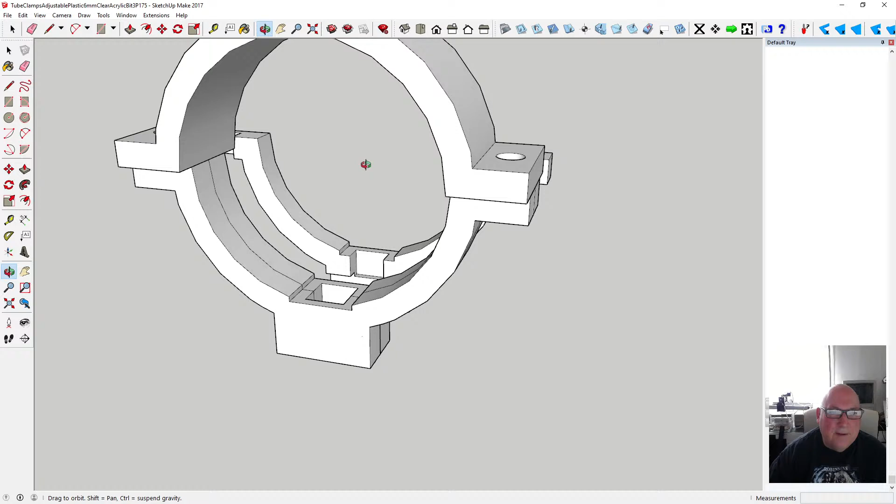So what I'd have is I'd have another one of these. Let's move it out another few mil. That's another 20mm. We'll copy this. Copy it 6mm forward, and we'll flip it. Flip along. I'll try the red one.

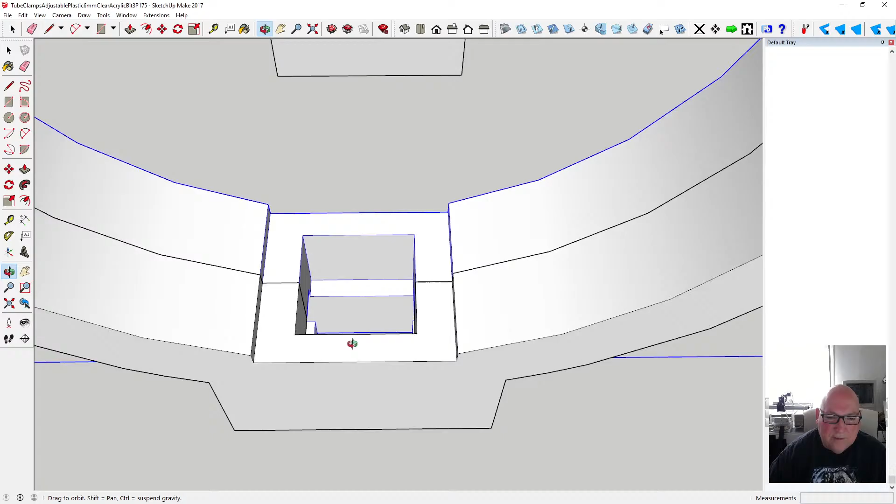Yeah, so basically you've got the other side of the shell. You can put your M5 cap head through there. Then you've got your slot, and you've got your shoulder for your cap head bolt to bolt down, or your nut to bolt down to your T nut into the slot. You've got somewhere for some adjustment to go.

There's more work to be done in here to make it work. But anyway, we'll leave it at that for now, and we'll have to alter the top to make another 2 pieces for the top, the same that end, but with a tongue on it, or an extremity that goes down and clips under.

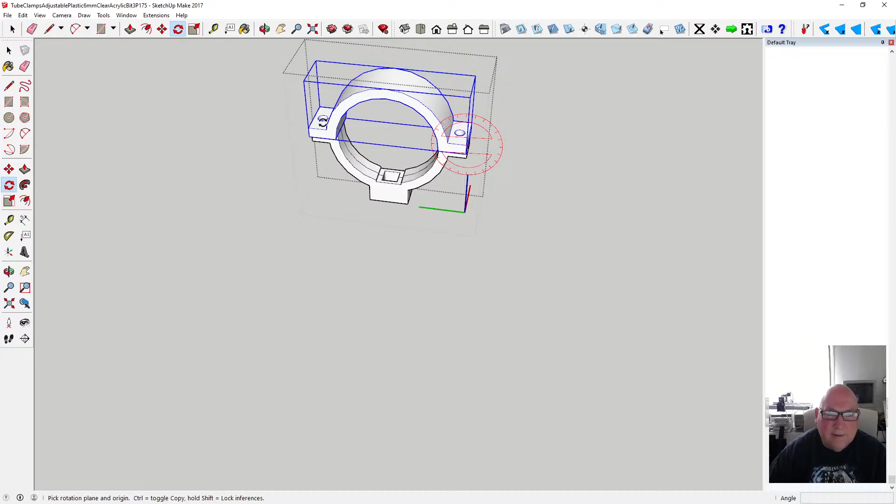So you put it in. So basically what you'd do is you'd put it in at that angle, you'd slot it in, and then you'd move it down and then bolt it. So you've got adjustment that way, and then you'd have adjustment this way. Oh, hang on.

Let's put the two together. Once you adjust this screw, you'll be able to adjust the movement this way as well. The only movement you haven't got, so you can clamp it and you can move it that way, but you haven't got an up-down movement on this one.

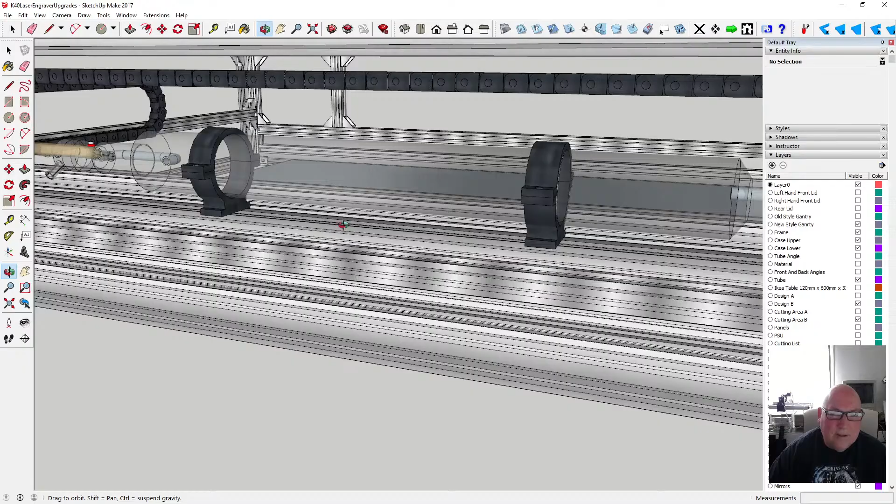So there's side-to-side movement, but we've got to make 2 clips. So one will be, oh no, wrong model. So the tube will have 2 clips. One will go side to side. You've got the clamp that clamps it to the tube, and then you've got your side to side. So we're gonna have to do something different on this one, and up and down.

So I don't know what that'll be, or maybe to see how we get on. Anyway, that's all I got for now.

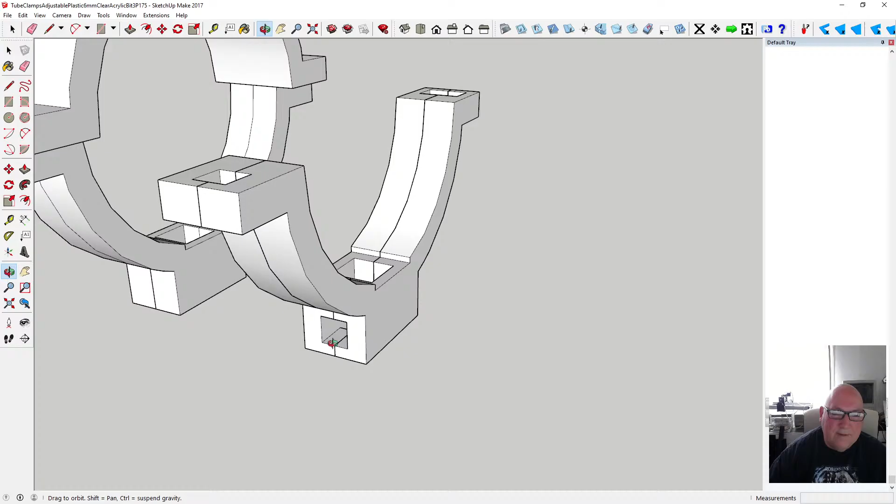Okay, let's go back to the thing. So yeah, we'll carry on with this later, but I've done similar stuff, and you basically bond these two together with either acrylic cement or spots of super glue, and when you push them together, because these are the shiny surfaces of a sheet of 6mm clear acrylic, and I'll probably make it out of some nylon to tell you the truth, but anyway, it'll be the same idea, and just glue it together, and then you can encapsulate your nut and everything else. So right, we'll have to carry on later on.